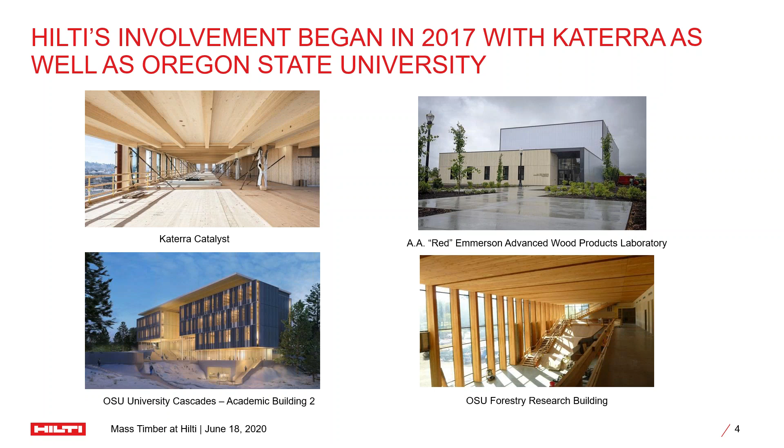Matthew is the leader of that for us at Hilti currently, and he's been instrumental—he'll elaborate more on this—testing different products, not only of the industry, such as these other manufacturers' products, but also various fire protection solutions we offer as a manufacturer. You can see some of the other projects we've had involvement with related to fire protection and other Hilti topics.

That brings us to other partnerships. One thing I've found interesting is we're keenly interested in looking at opportunities as a manufacturer to grow industries and emerging industries.

We have a very strong position, we feel, in our industry with concrete construction as well as steel type structures. Wood presents incredible advantages in terms of environmental aspects and sustainability, but also some challenges. And what we've encountered is other manufacturers with very similar needs to a manufacturer like us.

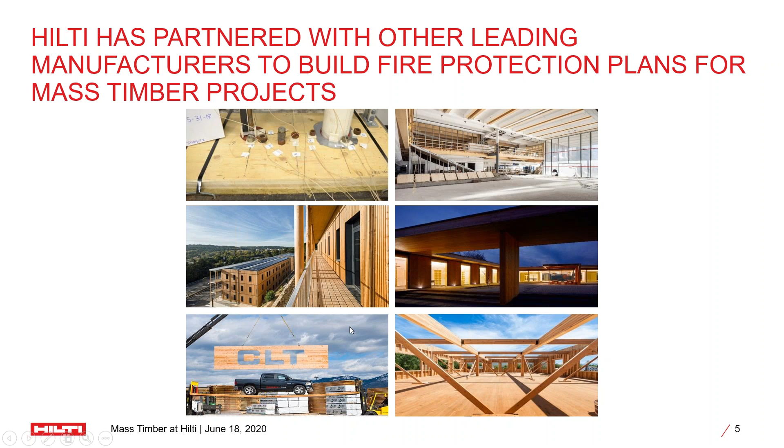Initially, mass timber construction created some challenges related to fire protection. When you break it down further and look at the specification side of the business as well as the implementation or construction side, there were major issues that manufacturers of mass timber products realized they needed to resolve early on if they wanted to build up at all. In many cases, there wasn't anything clearly published by major third-party testing agencies about listings.

In the world of fire protection, if you're a project manager trying to pass inspection and move from one phase of your project to the next, a critical component you must have, according to the local authorities having jurisdiction or the inspectors, is listings. You have to have paperwork to support that whatever you're building is in compliance with some type of building standard or code. That's where there's been a disconnect in the industry up to this point, and that's one of the initial findings where we felt we could really provide support, because of our expertise in fire protection as global leaders, to put a plan together.

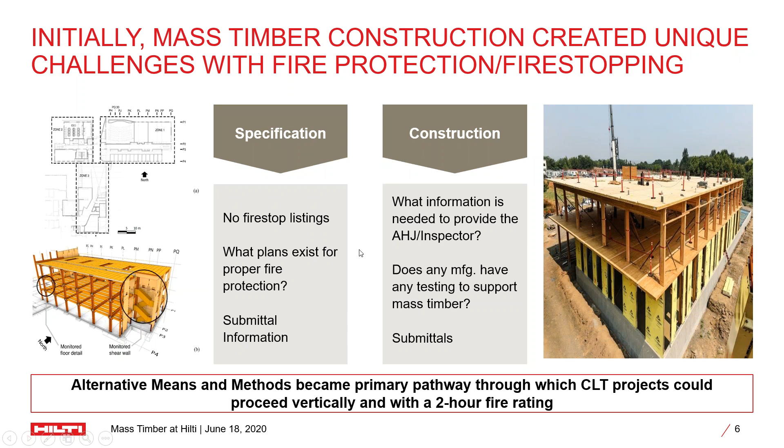So with that, I'm going to turn this over at this point to Matthew. He'll go through more details of how we've led the charge in FIRESTOP testing.

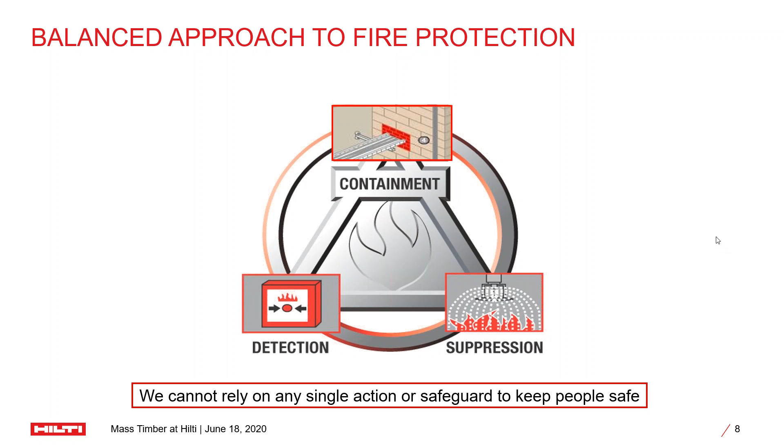But where we live in FIRESTOP is containment. Another word is compartmentation. Really, when you have penetrations through fire resistance rated construction, or you have joints created between different elements of fire resistance rated construction, that's where the story of FIRESTOP begins.

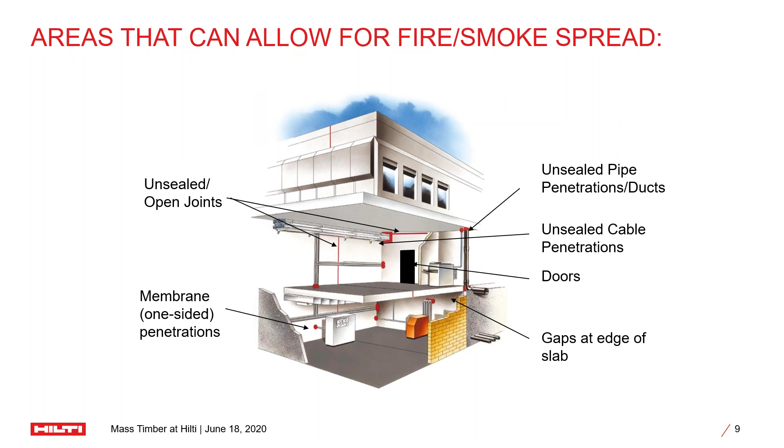When we talk about the testing, it's all in the realm of FIRESTOP and compartmentation. The goal for Hilti has been to remove any barriers around FIRESTOP and FIRESTOP systems for the mass timber industry and for design firms. It's also a key life safety initiative for our fire protection group. We've done quite a bit of effort to cover as many of the FIRESTOP test standards as possible.

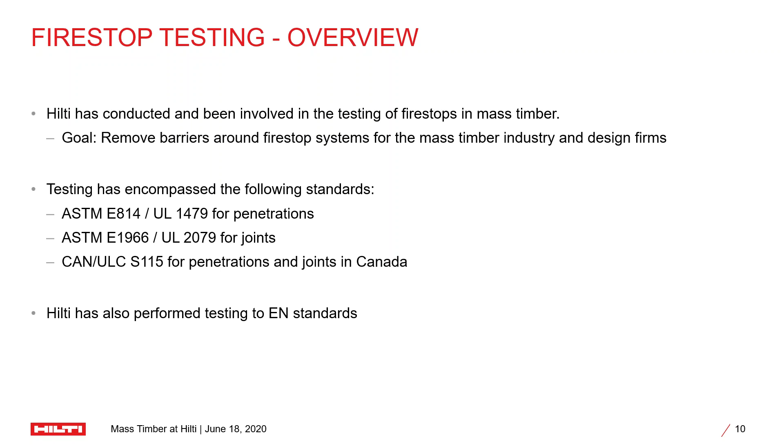Those include ASTM E814 for penetrations, ASTM E1966 for joints, and then for Canada, ULC S115, which covers both penetrations and joints. Moreover, the work hasn't taken place only in Hilti North America, but we have European counterparts who have worked with the industry on that side of the globe to do testing in accordance with EN standards. Hilti as an organization globally has invested in this mass timber initiative to be a partner, as Neal said, to remove the barriers and to really emphasize and support the life safety message.

So when we get down into specifics, we've really got about 40 applications tested. An application being you have a metal pipe penetrating through a mass timber floor or wall, as compared to a different application, it would be a plastic pipe. It includes joints, includes coverage for up to 2-hour assemblies. And even for Canada, looking at coverage for the enhanced pressure requirements that are required for non-metallic pipes in the National Building Code of Canada at 50 Pa.

What's really important is testing in a variety of mass timber assemblies. Neal did a great job of giving an overview of the many great relationships that we've been able to enjoy. This allows us to ensure that solutions work across different mass timber elements, and that's going to be extremely key when we look at data extension and really how to move forward into listings.

When we look at a device like an intumescent sleeve, you have to test the different ranges, the envelope of that device. What does it look like when it's blank, without anything running through the device? What does it look like with cables? When you talk about recessed electrical boxes that accommodate light fixtures, you have to look at, again, the envelope. Okay, how about with or without cover plates?

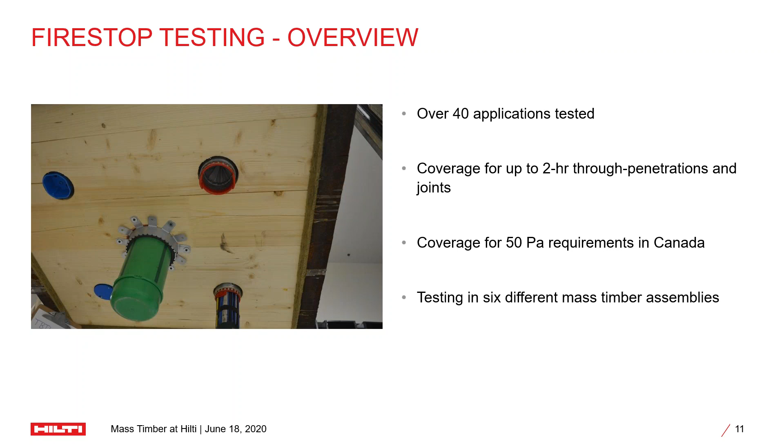This just gives you a flavor of what we do on the FIRESTOP testing side to make sure we cover everything holistically that we can basically design to the mins and the maxes that we're going to experience. Of course, with the testing that we've done, we have testing that's ongoing.

Big topic is different categories of mass timber. CLT has been a focus. It's certainly been a focus, I would say, all across this story of mass timber, but for testing, it certainly has. But we are looking soon at even dowel laminated timber, mass plywood, and other elements. This is very exciting for us.

Also, to date, there is no testing for what we call edge of slab or perimeter fire barrier systems, or another term you might have heard is curtain wall systems. That standard is ASTM E2307. We hope that, through other collaborations, we can turn that around and have some data for the industry later this year.

And of course, the supporting design community on key projects, working with building officials directly, in some cases providing testing information for them in the absence of listings, and we'll look at that a little bit later. But I can't overemphasize just how excited I've been from the fire protection standpoint at the response of the entire mass timber industry, from organizations like Woodworks, the Canadian Wood Council, American Wood Council, to individual manufacturers.

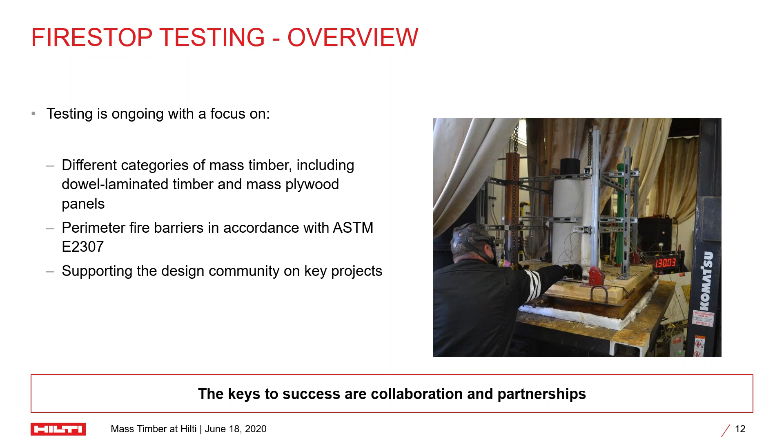Neal has mentioned KATERRA, Nordique, DR Johnson, Structurlam. We could go on—some of the great things going on at Southwest Research Labs. Mass timber has really brought about a lot of enthusiasm for the life safety message centered around fire protection, and I'm certainly proud to be a part of the story. I think overall the efforts have been great.

To give an overview of that effort, we'll look at a timeline, at least from Hilti's perspective, of what testing we've done. In January 2018 we started the planning phases with the research project that Neal mentioned and with KATERRA, so that by March 2018 we were able to run our first FIRESTOP test for CLT in-house. That continued through 2018, where we focused on the KATERRA CLT assemblies. They sent us specimens, followed by Nordique sending specimens as well.

The real interesting part is there are actually UL-listed designs held by Lend-Lease for the Nordique floors. That was a key topic in looking at the listing discussion with the certification agencies. And then even external labs, as I mentioned, with Woodworks and IPEX, a manufacturer of piping systems, again investing in the story of what to do for particular penetrations in accordance with Canada approvals.

And of course it goes on to date. Again in 2019, we did what we're doing here today, really trying to spread the word and the message that there are tested, proven solutions out there for FIRESTOP in mass timber assemblies. We did that at the International Mass Timber Conference last year. Of course we all had to miss out this year, but with collaborations such as this online, hopefully we can still keep driving the message forward.

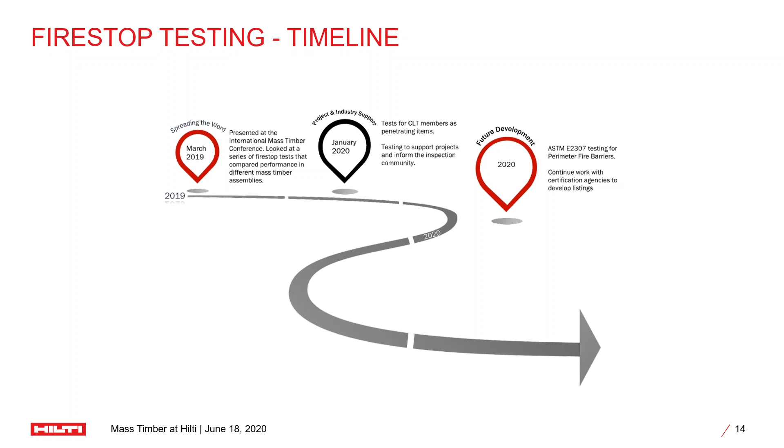What I want to do is give you guys a brief look at some of the information we shared in 2019 regarding the FIRESTOP testing. This is also really important when we talk about driving the initiative forward and leveraging efforts—comparing performance across different mass timber assemblies.

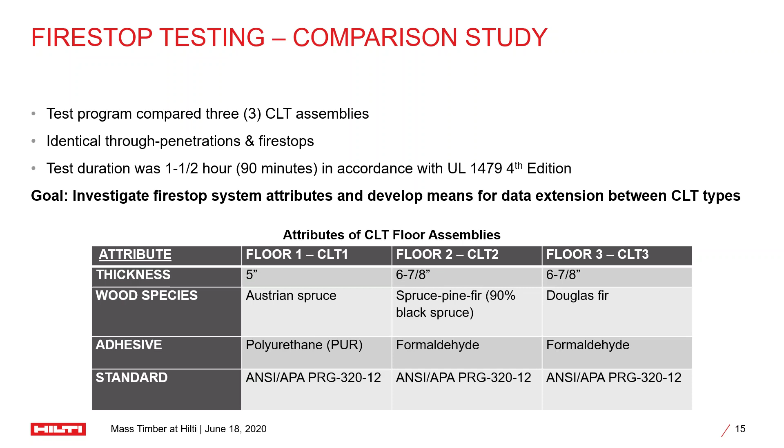So there's nothing preventing the design community from making a wonderful built environment that mass timber can provide. What we did is take these 3 assemblies and put the same 5 applications within each assembly—those applications being penetrations of metallic and non-metallic piping.

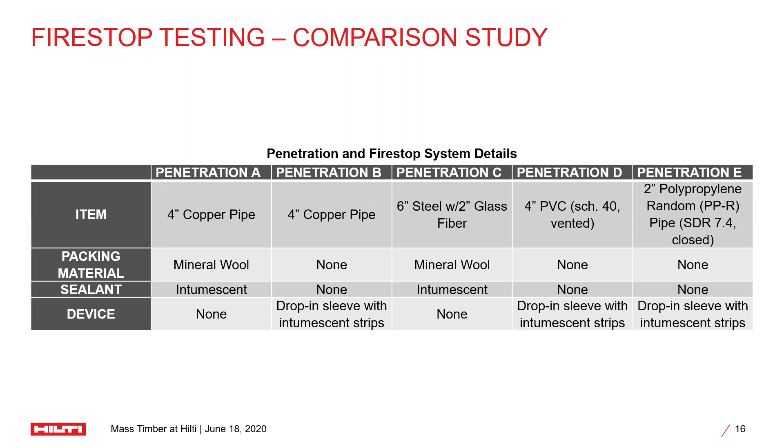We used the same 5 FIRESTOP systems for each penetration. The FIRESTOP systems comprised mineral wool as a backer for FIRESTOP sealant, and also a device involving a sleeve that you can drop into the floor, with intumescent on both the interior and exterior of the sleeve. The exterior part is going to be very important for mass timber.

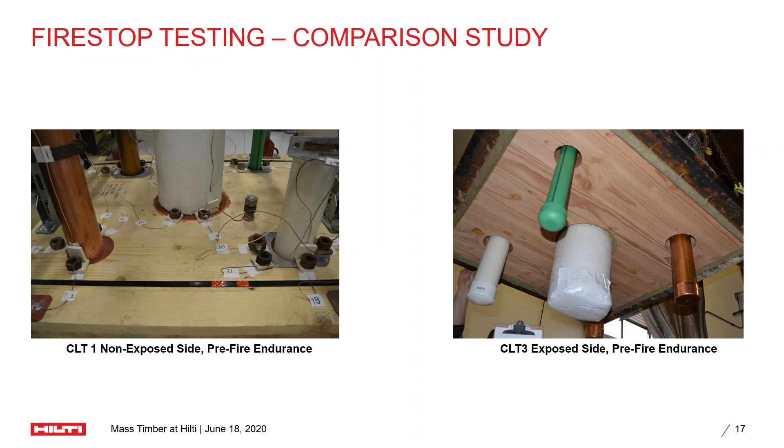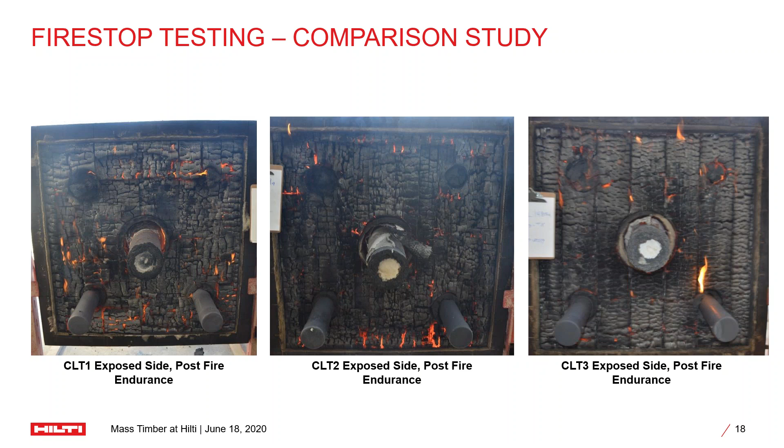Looking back at those design listings, that L901 design listing with a 90-minute rating for an exposed mass timber element, a 5-ply CLT. There are many things you gain, but we see that even with a loss of material, a loss of some layers of CLT, we were still able to pass for fire.

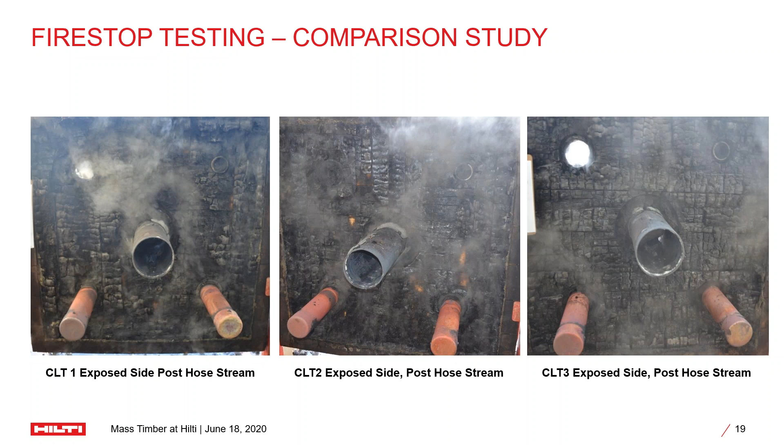So in this comparison study, again just briefly, failures and passing is always informative. It's very important, but we did validate the method of extending data between CLT floors. As we look towards testing in other mass timber assemblies, the same will be true. What programs do we need to put in place? So for glulam or mass plywood or the next generation of designs, how can we quickly run some tests and evaluate and understand where the envelope of performance lies with respect to firestop?

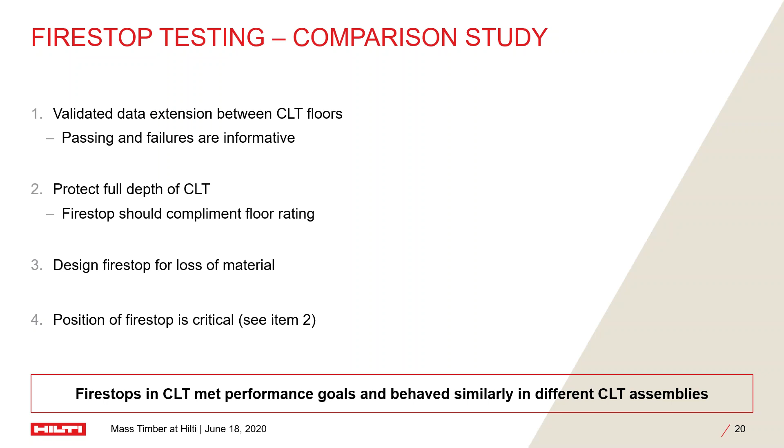Of course, we need to protect the full depth of the CLT assembly. We don't want unprotected openings, even if it could pass for firestop. We still want to be mindful that these are structural elements and should be treated as such, designed for loss of material, that goes back into that story. And then of course the position of the firestop is critical. The main thing is that firestops are meeting performance goals in mass timber and CLT, just as they do in traditional concrete systems.

So with all that, really the question becomes, what about the listings and certifications that everyone is used to? I'd like to start by saying that listings are certainly best practice, yet model building codes use the language tested and approved when it comes to firestop systems. When we look at the firestop testing earlier, it's done in accordance with reference standards and code. It's then up to building officials to approve that testing just the same way they do listings.

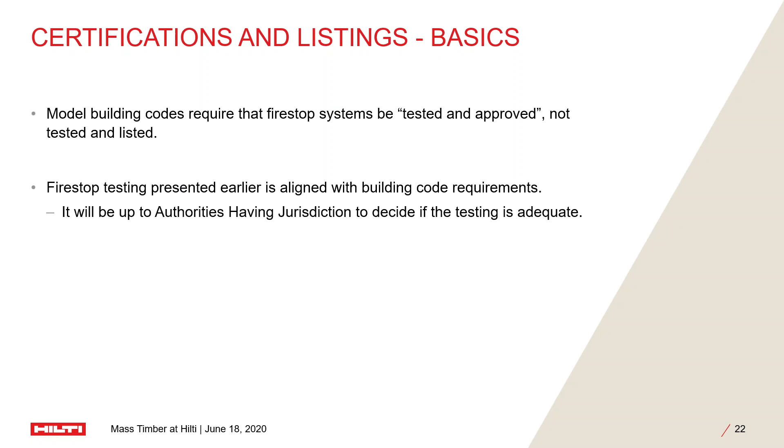Now this doesn't mean that our pathway to listings ends, because it's very informative and it's very easy for someone to look at a listing and understand it, as opposed to running through 100 pages of test data and then trying to translate that. But just as a quick overview, a listing is the result of engineering evaluation of test data.

So again, the burns and stuff that you saw, we sit down and come to terms with the listing agency to say, what should we publish? What are we very comfortable with that's reproducible, that will pass, that's repeatable? Since the set of instructions and rules for the installation of firestop, again, they are best practice, although not necessarily required by code.

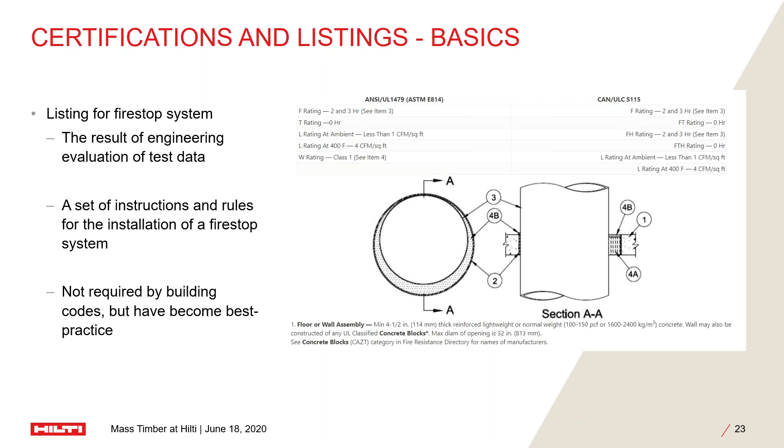In this picture you see a typical header for a firestop system. At the top, it lists which standards the system is evaluated to - in this case ASTM E814, and of course S115 for Canada. And then it gives you the ratings that apply to the firestop system, a graphic detail along with text and information that explains each item of the detail. Again, making sure it's very easy for someone to check that the system is designed in accordance with the building code that applies in this case, and that we understand how to install the system and when this system can be put into effect.

So again, certification is really required for listings, and it really refers to the products used in such systems. When we look at something like a PVC pipe or other plastic pipes, for example steel pipes, they will have other standards that they are built and constructed to. So there is some means of controlling and limiting the variations that you'll see in products. Not necessarily everything on the listing would need to be certified, but certification for firestop is something that always happens. For example, Hilti products have to be certified - this means plant inspections, documentation on file, and routine audits of all of our firestop products.

So then we really look at why we don't have listings to date despite adequate testing. It's really because we're in the information gathering stage, the data gathering stage. One thing I'm very excited about as a member of the passive design community is that the amount of testing for fire resistance rated designs is extensive.

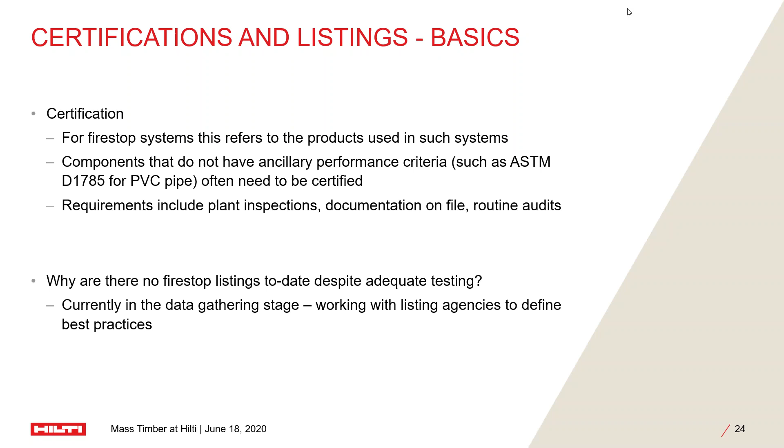People understand that sprinklers are tested, but the library for fire resistance testing, which includes fire stops and assemblies, is massive. When a listing agency looks at a concrete design, they have thousands of data points to choose from, but right now only a handful of data points when we're looking at mass timber. So really the goal is to keep the collaboration going, keep generating data, and keep working with listing agencies to come to best practices for listing.

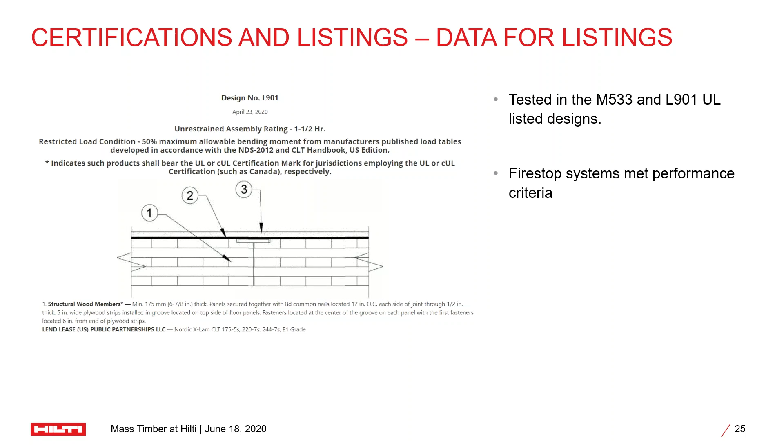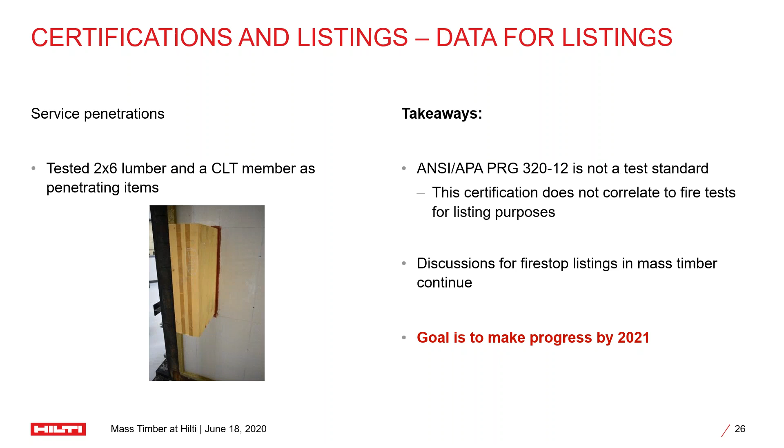One thing I get asked about is that PRG 320-12 is not a fire test standard the same way that UL 1479, or more specifically ASTM E814, is a test standard. It doesn't assign ratings to the elements. It gives you best practices and guidelines to follow, but it's not a substitute for fire resistance testing. So this means it is likely not to be used as an element for certification going forward. But the discussions and collaboration with listing agencies continue, and we really hope and believe we can make progress on providing some listings by 2021.

So with that, I appreciate being able to present today, and I'll turn it back over to Neal to look at some of the code updates and implications for us.

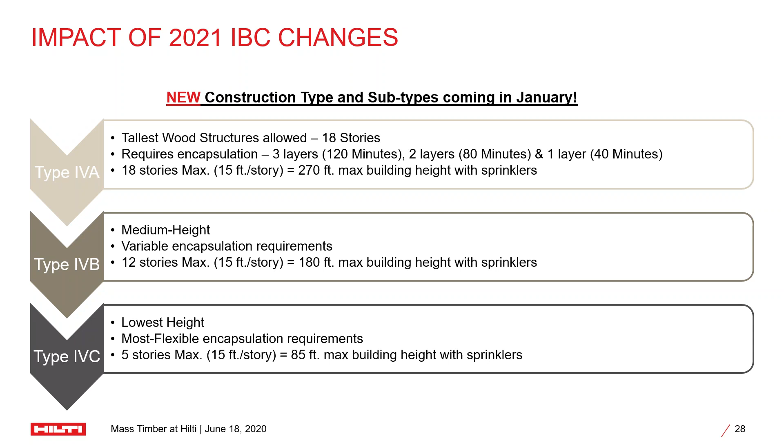So now I'd like to talk a little bit about what we've uncovered as one of the critical value propositions that the mass timber market brings, and how Hilti has tried to integrate into that—because it's not just the story. It started with us being involved from a fire protection standpoint, but really where we feel it's our storyline as a company: if you look at Hilti, we're trying to move away from individually dealing with one application and solving one little problem. What we're trying to do is look at an overall application approach, where we look at the entire application—in this case, a type of construction—and develop and market our products, solutions, services and software to support that.

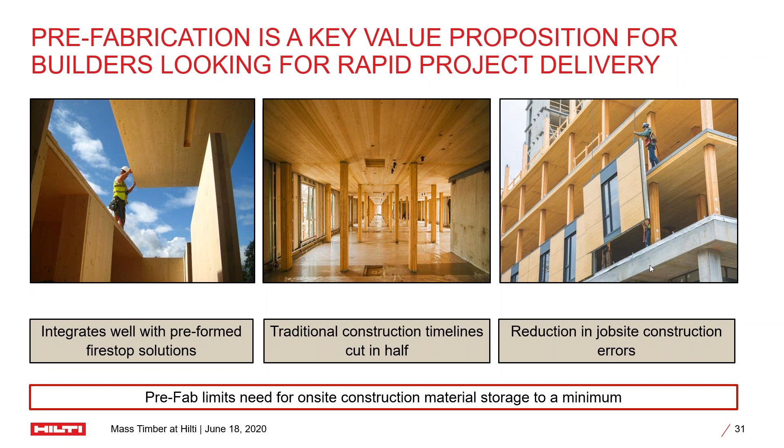To conclude the session for today, as it relates to our story, we want to showcase some of what we're doing to support this as a manufacturer, making sure we have relevant solutions. There are some images here that don't relate specifically to mass timber, but they showcase some of the products and services, mainly products, that incorporate innovation for us.

As a manufacturer, we're not just focused on fire protection. There's other aspects of tooling, such as cutting and coring. When Matt was doing tests for some of the mechanical electrical penetrations, we used our diamond tipped core bits to core out the holes so we could do the tests for mechanical penetrants, or other types of penetrants. We actually found it works very well, almost too well, because the diamond segments don't deteriorate, they maintain themselves. I don't want to call it an infinite solution, but it does do very well.

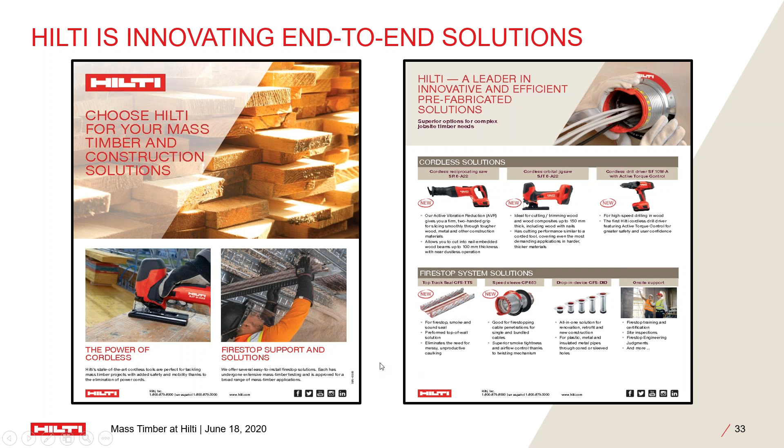So this is just giving you a little bit of an idea of what we've been working with in terms of this topic of innovation. And then to finish up here, one of the exciting things I'm really proud of, like Matt mentioned on the testing side and the product development side, you can see some of the products that Hilti supports, but also that we're working on development.

I just had a recent conversation with a counterpart of mine in our anchoring business unit, and she's working on development of adhesive anchoring technology for the mass timber market. We have some of the best, most famous anchoring products in the world. If you're familiar with the Big Dig, you can look us up online about what that was all about. But we are looking at alternatives to some of the challenges faced with the adhesives, maybe figuring out a way to integrate formaldehyde-free options, as an example.

It goes together with the idea that if you're trying to build a mass timber project, one of the things you're probably keen on is sustainability. And formaldehyde, from what I understand about this topic, is not a good thing to have in products as you try to build something that has to do with green building. So we're working on that.

We also are looking at potentially carbide tip technology for some of our coring tools, so we can allow for easier prefabrication. Screw fastening is one of the other foundations of our company. We actually invented some of the powder actuated direct fastening products that you may know, nail guns and pin guns, as well as some of the drilling technology and cordless tools and cutting.

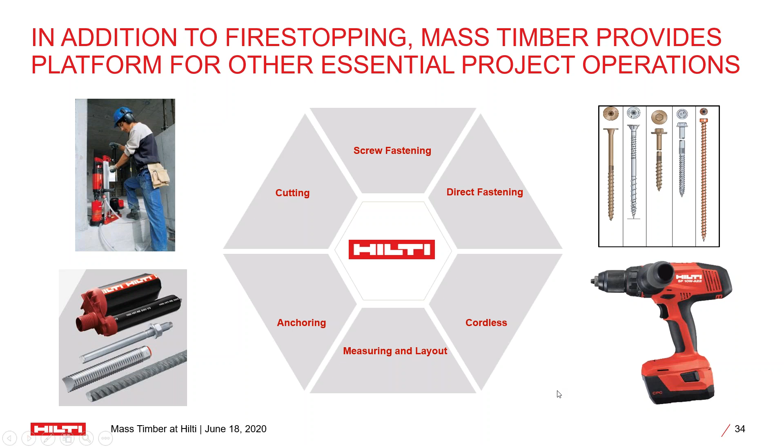So with that, I wanted to leave you guys, before we get into any questions you may have for Matt and I, with some additional resources available to help solidify and enhance your education when it comes to the topic of FIRESTOP specifically. That's really what we've been spending most of our time on, along with other information related to mass timber.

So with that, that's all we had at this point. I guess we'll turn it back over to Mike and see what questions we have.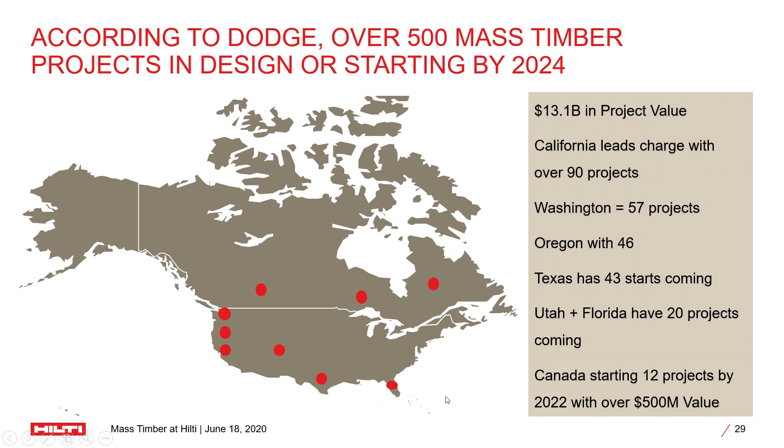If the question is in regards to fire resistance ratings, the traditional ASTM E119, there's actually testing ongoing that shows firestop sealants being used at those connections to great effect. In the presentation, we looked at one UL design listing where the floor achieved a 90-minute rating. It was a 5-ply floor, 6 7/8 inch thick overall, without encapsulation on the bottom. We've seen similar floor assemblies retested to E119, but adding firestop sealant at the spline joint, where they cut a groove out of the top of the panels where they meet and set plywood on top. There are other joint connections, but the short answer is adding an intumescent sealant has indicated enhanced fire performance for fire resistance design of floor assemblies. That's something we're working with the industry and a few folks who've done that testing to explore further.

Heather had a question: do you know how many factories in the U.S. are capable of fabricating CLT and MPP, mass plywood panels? So how many are there in the U.S.?

I don't have a specific number, but I'd say it's growing. For firestop, we see interesting trends, and where we might not know specifics, we know the trend. There are more manufacturers of CLT coming online. There's a growing variety of mass timber options. Mass plywood is now starting to get really good attention, and there's a number of manufacturers we've seen there, as well as dowel laminated timber, glue laminated timber. I can't tell you the exact numbers, but whatever the number is, it's likely to increase, at least in the medium term.

I'll add to that a bit. Some of the manufacturers we mentioned earlier in terms of partnerships we've developed are building manufacturing facilities around where you find sustainable forestry. In many cases that's up in the Pacific Northwest, as well as markets such as Arkansas, which is one of the hotbeds where they're able to process lumber but also set it up so it's sustainable, driving the production value of mass timber construction with paneling, while also having a replenishable source down the road. So if you're trying to locate where some of those manufacturers have operations, many of them are centered wherever you find research supporting these sustainable forestry areas, mainly across North America.